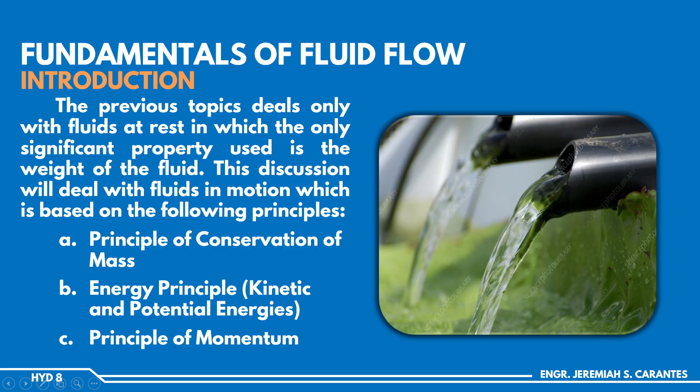We have three main principles around which our discussion on fluid flow will revolve. First, we have the principle of conservation of mass. This principle states that mass can neither be created nor destroyed within a closed system.

In other words, for example in a pipe, since that's closer to fluid flow, whatever volume of water or liquid enters the pipe, that same amount will also leave, assuming that the pipe itself is a closed system, meaning there are no external factors that can affect it. So that's basically what the principle of conservation of mass means - whatever enters is what also leaves.

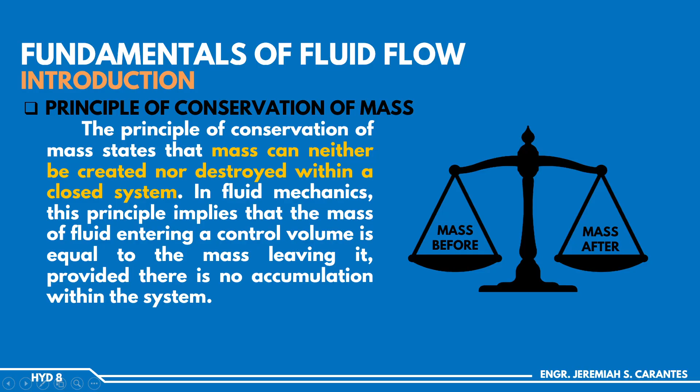So in fluid mechanics, this principle implies that the mass of fluid entering a control volume is equal to the mass leaving it, provided there is no accumulation within the system.

Another principle is the principle of conservation of energy. This is similar to our principle of conservation of mass, except that it now refers to energy. This principle also states that energy is conserved - it's not added to nor subtracted from. However, when it comes to energy, it can change form from one to another.

The common forms of energy we know are kinetic energy and potential energy. We'll discuss these later on. Kinetic energy is due to motion, while potential energy has two types - due to position and due to elevation - which together govern the behavior of fluids as expressed in the energy equation such as Bernoulli's equation.

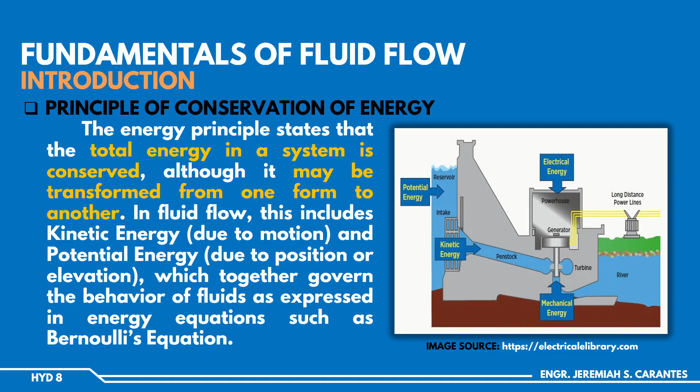The third one is the principle of conservation of momentum. This principle was actually already tackled last time in relative equilibrium. If you can remember, we derived our formula: F is equal to MA. But what we used last time was the reversed effective force. But there, we showed that the change in momentum will actually give us this equation, Newton's second law of motion.

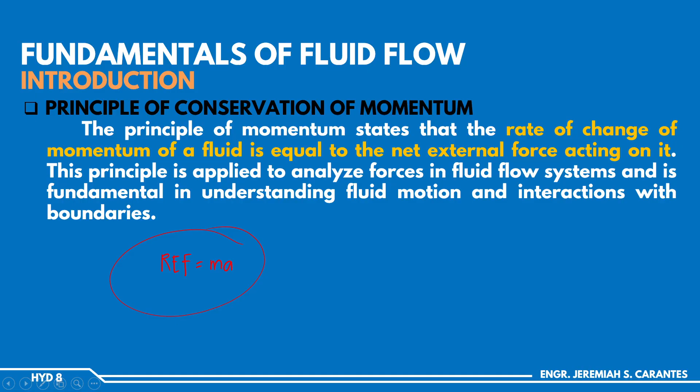This principle is applied to analyze forces in fluid flow systems and is fundamental in understanding fluid motion and interaction with boundaries. The first two principles are the main ones for our early topics in hydraulics, and momentum is more often seen in the latter part, specifically in hydrodynamics.

For this one, we have the discharge or flow rate. The notation we use for it is capital Q, or uppercase Q. By definition, it is the amount of fluid passing a section of a stream in unit time, called the discharge. When we say amount of fluid passing, we can express that as the volume, per unit time - so that's volume divided by time. This is equal to what we call discharge.

When it comes to discharge, we have three versions: the volume flow rate, mass flow rate, and weight flow rate. By the way, for discharge, as we said, this is volume over time, so of course we can express its unit. What's the common unit of volume? That's cubic meter. The common unit of time - well, it's not really common, there's only one unit of time we use.

That's seconds, minutes, hours, and so on. So cubic meter per second is a common unit for discharge.

Now, this is not the only formula for discharge. It can also be expressed as Q, M, or W. This Q, the volume flow rate, is the same as our volume over time formula - the values are the same, just different formulas. So our Q can also be expressed as the product of the area of flow times the velocity of flow, which is still cubic meter per second.

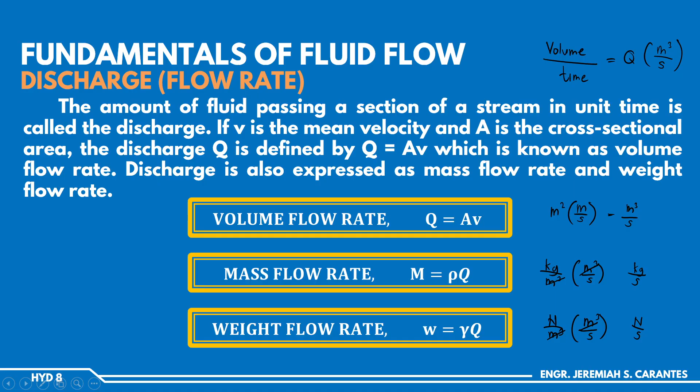So these are the different expressions of our discharge. And these are our notations, along with the common units used for each.

Next one is the types of flow. I listed 4 here, but flow types aren't limited to just 4 - these are just the significant ones for our fundamentals. First, we have steady flow.

It is the type of flow wherein the velocity of the fluid is constant at any point. The opposite is unsteady - when the flow is unsteady, the fluid's velocity can differ between any two points.

For example, our velocity is said to be constant at any point. So if we have a flow from point 1 to point 2, at any point, the velocity is constant, regardless of which section you pick.

Now there's one with almost the same definition - that's what we call uniform flow. This occurs if, with steady flow for a given length or reach of a stream, the average velocity of flow is the same at every cross-section. It seems like a similar meaning, right?

But just to differentiate the two - let me write this down. For steady flow, our concern is the velocity. So steady and uniform are both about velocity, but what differs is that for steady flow, the change in velocity with respect to the change in time is equal to 0.

While for unsteady, of course, it's not 0 - meaning the velocity varies with respect to time.

While for uniform flow, the velocity is still constant, but it is with respect to the given length or reach. Meaning the change in velocity with respect to the change in position is equal to 0. I hope you understand the difference.

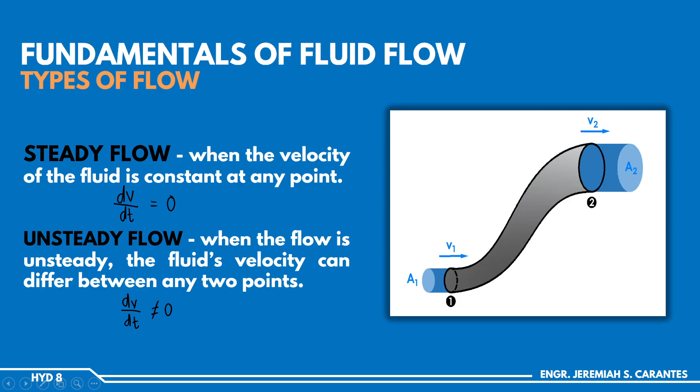So here, at any given time, the velocity is constant. Here, at any given section, the velocity is constant. I hope the difference is clear.

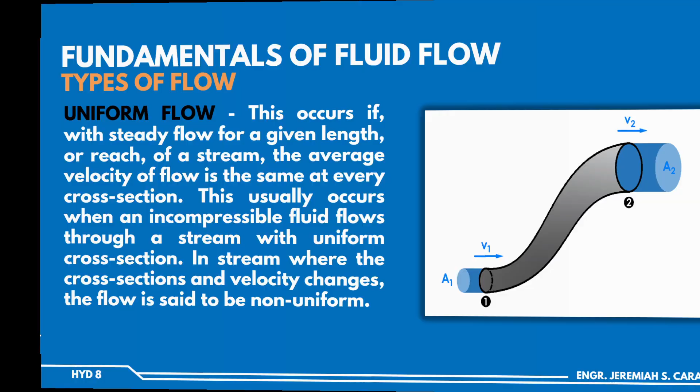And then the fourth one, we have continuous flow. Here, the discharge is constant at every section - the change in discharge with respect to the change in time is equal to 0. So the discharge doesn't change - whatever flows into section 1, the same amount flows out at section 2.

Next, we have the continuity equations. This is actually based on continuous flow. Whatever amount of liquid passes through section 1 should be the same amount that passes through section 2 - that's the concept of constancy of discharge. So we can say that Q1 is equal to Q2.

Remember the formula for Q - we can express it as the product of area and velocity. So we can say area 1 times V1 is equal to area 2 times V2. To maintain constant discharge, since the areas are different, area 2 is much larger than area 1.

From this continuous flow, these continuity equations originate. Now we have two types - for incompressible and for compressible fluids. For incompressible fluids, the constant is the volume flow rate. For compressible fluids, the constant is the mass flow rate and the weight flow rate.

For discharge, here's the formula - area times velocity, and that's constant, regardless of which point you consider in the system. Same with compressible fluids - mass flow rate at point 1, point 2, and point 3, and the weight flow rate, are constant at any section in the system.

Next, we have energy and head. It's important to understand what these two terms mean. When we say energy, it is defined as the ability to do work. The unit for energy and work are actually the same - expressed in terms of Newton-meter, which is equal to the unit joules. So joules is equal to Newton times meter. In English units, that's pound-foot.

Kinetic energy and potential energy are the two commonly recognized forms of energy. In a flowing fluid, potential energy may be subdivided into energy due to position or elevation above a given datum line, and energy due to pressure in the fluid. While head is the amount of energy per Newton or per pound of water. When we say energy, this is what causes the flow in a liquid - energy is what causes the motion.

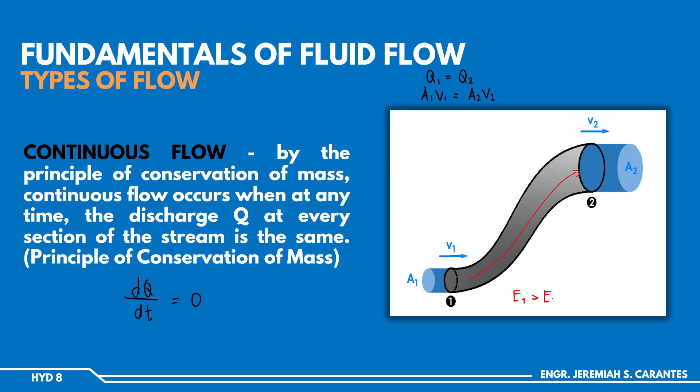It is also said that from point 1 to point 2, flow occurs when the energy is greater at one point. For example, in our figure, let's go back to this - we can say the flow of water is from point 1 to point 2. So the direction of flow will be like that if the energy at point 1 is greater than the energy at point 2. That's the significance of energy.

While what we refer to as head is actually the expression of this energy in terms of a column of fluid or a column of liquid. So that means the greater the energy, the greater the head as well. This head we can also call energy head - we're just more accustomed to using the term head for it. So to repeat, greater energy means greater head, and vice versa - greater head also means greater energy.

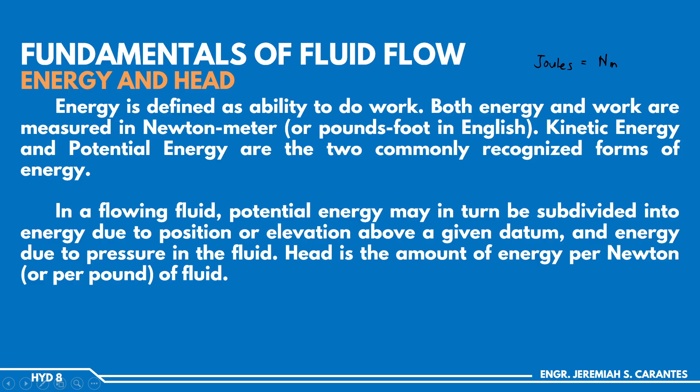Kasi si head is actually the amount of energy possessed per Newton of fluid. And for this head, meron tayong iba't ibang klase sa kanya. So, ito na yung mga yun. So, first, we have the kinetic energy and the velocity head.

It is the ability of a mass to do work by virtue of its velocity. The kinetic energy of a mass having a velocity, so ito yung ating formula, no? I hope familiar naman lahat to from physics. Kinetic energy is equal to 1/2 mv squared, where m is the mass and v is the velocity. So dito, ang ating mass can be expressed as weight over the acceleration due to gravity. So this is staying with the formula na W is equal to mg. So pinalitan lang natin, in-extract natin yung m. So dito, if we substitute this m sa ating equation ng kinetic energy, we get that the velocity head is equal to velocity squared divided by 2g.

Siguro para mas maintindihan, no? When we say head, ang definition kasi ng head, basically, H or the head is equal to the energy divided by its weight. Masakit sa mata ang kulay red, gawin ko na lang siyang black.

So for example, dito, if we want to get the velocity head, we use the kinetic energy and divide it with its weight. Now dito, ang kinetic energy natin, by formula, that is 1/2 mv squared, divide it with W na weight. Now from this one, sabi natin si M, pwede natin siyang palitan ng W over G while multiplying with V squared and then divide it by W. Na if we simplify this, magka-cancel yung W. So ang matitira, V squared tapos sa ilalim merong 2G. That's basically V squared over 2G.

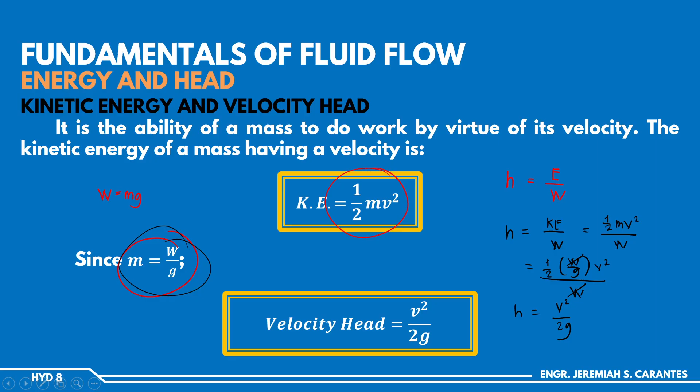So ganyan na-derive yung ating velocity head, just substitute energy over weight. So ito yung general formula natin pagdating kay head, regardless kung anong energy ang gamitin mo. So just be specific, no? Kung velocity head, kinetic energy ang gagamitin. And pagdating kay itong dalawang ito, pressure head and then elevation head, so ang gagamitin mo naman is si potential energy. So dito, ang ating gravitational potential energy, by formula that's mgz.

So Z yung ginagamit pero sa physics kasi it is commonly mgh. Yun yung formula natin. So dito, sige, gamitin natin muna yung h para makuha yung elevation head, so that's potential energy divided by its weight. Ang potential energy due to gravity, that's m, g, and h. While si weight, 'di ba sabi natin equal lang din naman siya kay mg. So magka-cancel lang, basically si h equal lang siya kay h. Kaya hindi h yung ginagamit natin kasi magiging parehas sila ng notation.

So dito yung z natin basically that's an elevation from a set reference point na tinatawag nating datum. So for example, magse-set kayo ng reference point, let's say ito yung ating datum line. And then, baga ito yung point mo, let's say, meron kang elevated na tank. Ito yung tubig niya. And then, you can say that from the datum line, this is 2 meters. So, etong location ng 2 meters, actually, kayo yung magsiset niyan.

So, depende kung saan nyo gustong ilagay. Gusto nyo 2 meters below the bottom ng ating tank, or kung gusto mo naman, 10 meters below the bottom of the tank, okay lang siya. Ang importante kung ano yung sinet mong reference considering ang isang system natin, kung maging consistent na siya regardless kung anong kino-consider mong point dun sa system na yan.

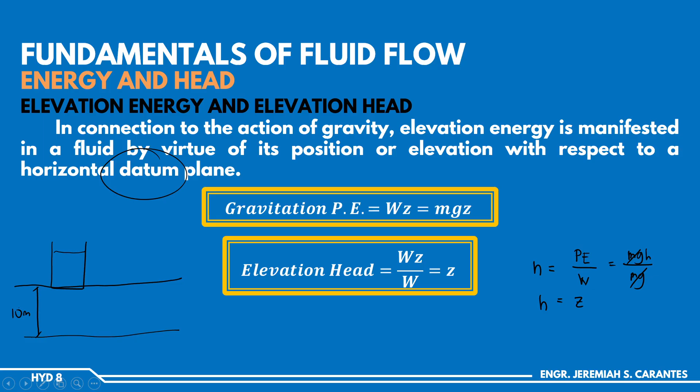So, kung gusto nyo, pwede rin nandito ang ating datum line just below nung pinaka-tank natin. Okay lang din na nandyan yung datum line nyo or the reference plane. Walang limitation naman na nagsasabi na dapat ganito or ganyan yung location ng datum. Pero siguro wag niyo na lang pahirapan yung sarili niyo. Kasi minsan, siyempre eto si elevation, importante rin yung direction. Possible na from a reference point, positive or negative yung elevation ninyo. Siguro wag niyo na lang i-set yung reference niyo wherein magpo-produce siya ng negative na elevation, para hindi na kayo mahirapan. So, eto yung ating elevation head and then the other is the pressure head.

So, si pressure head is expressed as P over gamma. Now, kung gusto niyo makita pa rin yung definition, 'di ba sabi natin si H equal siya kay potential energy divided by weight. Si potential energy natin, that's mg times H divided by weight.

Dito, i-express natin ulit si M as the ratio ng W over G, while si H pwede natin siyang i-express in terms of P over gamma. Eto rin yung formula natin sa principles of hydrostatics na ginagamit natin dati. Now if we substitute everything, si pressure head equal siya kay W over G times G times P over gamma, divided by weight. So everything cancels except P over gamma.

Kung gusto niyo mas direktang derivation, tandaan niyo yung formula na 'to kay hydrostatics, P is equals to gamma times H. So this is the pressure caused by this unit weight. Etong H na 'to is the height of a column of liquid which produces this magnitude ng pressure. So from this, ito lang din naman yan - H is basically P over gamma.

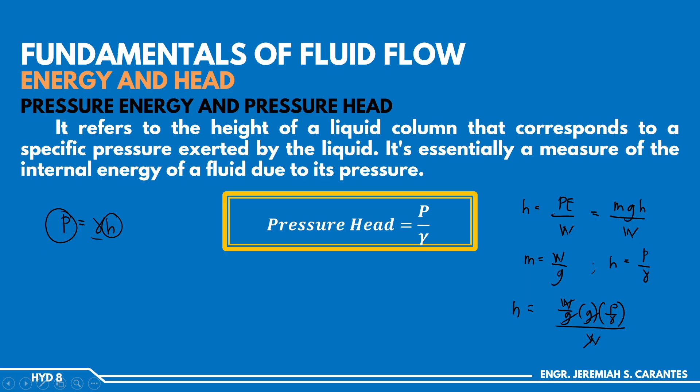Pero ito ang derivation natin kung gusto niyo siyang i-relate dun sa ating energy over weight na formula. So this is the pressure energy and pressure head. Dito, isang head para kay kinetic energy, at dalawang head para kay potential energy. So in total, meron tayong tatlong energy, tatlong klase din ng head. Pag pinag-add natin yung tatlong yun, ang tawag natin doon is the total energy or the total head.

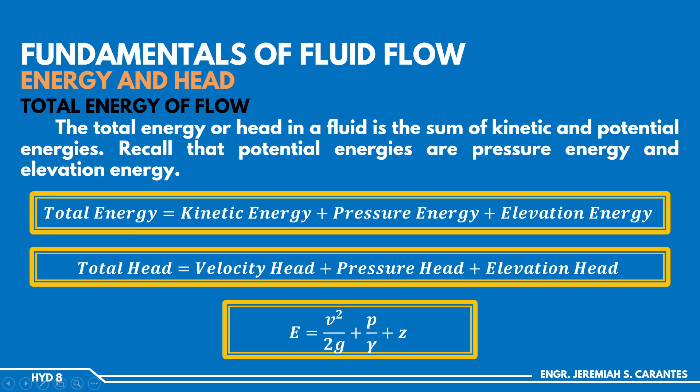So ito naman yung mga yon - the total energy, dagdag mo lang lahat ng energy: kinetic, pressure, and elevation. Ganon din dun sa kanyang head: velocity head, pressure head, and elevation head. So by formula, ito yon - ito yung ating velocity head, ito yung ating pressure head, ito yung ating elevation head. Ipag-add lang natin lahat to get the total. Etong equation na 'to, ito na kasi yung gagamitin natin para dun sa ating mga energy equations. Ito yung ating mga notations and their common units.

Okay, next is we have the hydraulic grade line. Si hydraulic grade line is actually a line that can be drawn if you add yung ating mga potential energies or potential head. Dito, ito yung ating datum line. Let's say ito yung ating setup - meron tayong isang pipe, kikita naman yung direction of flow. And then nagbigay tayo ng dalawang piezometer at point 1 and point 2.

Dito, ang ating hydraulic grade line, basically madodrawing natin siya if from point 1 to point 2, for example, series of points - itong mga point na to, kinonsider mo lahat. Tapos yung mga point na yan, kinuha mo lahat ang kanilang elevation head plus yung kanilang pressure head, kasi basically yun yung total na potential head natin. Remember, dalawa kay potential, isa kay kinetic. So kapag pinag-add mo lahat yung potential head nila, tapos ginawa mo yon for series of points sa isang line, tapos drawing mo o plinat mo yung mga points na yun, magdodrawing natin yung ating hydraulic grade line. Isa pang characteristic ng ating hydraulic grade line, it actually follows the water level dun sa ating mga piezometer sa ganitong klase ng setup.

Dito actually meron tayong mas detailed na description yung dalawang lines na yan. HGL and EGL both slope downward in the direction of flow. Dito kay HGL, it may rise or fall due to the change in pressure, while kay EGL, it will only rise with the presence of a pump. Babalikan natin - ito yung direction of flow from point 1 to point 2.

So the slope is downward for our two lines with respect to the direction of flow. Same with this example: from this tank, the water will flow towards the smaller tank because it has less content. So both the EGL and HGL slope downward.

So other characteristics, let's focus on HGL first. HGL is parallel to EGL for a uniform pipe cross-section. An example of that is this first figure - EGL is parallel to HGL when it's uniform.

The pipe we're referring to is this one. We placed two standing pipes, the piezometers, which are just there to measure the amount of pressure at each point. But our actual pipe is this bigger pipe. So when the cross-section of our pipe is constant, EGL is always parallel to HGL.

As you can see in our second figure, the two lines are no longer parallel because the diameter at point 1 and point 2 are no longer the same.

Okay, another characteristic: for horizontal pipes with constant cross-section, the drop in pressure gradient between two points is equivalent to the head loss between these two points. We already know what head means.

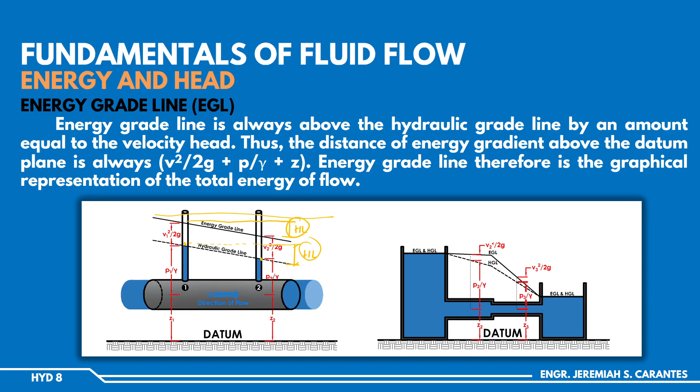Next, we have the Bernoulli's energy theorem. This is actually the main theorem when there's no head loss. When we say there's no head loss, this is the appearance again - going back, the EGL is horizontal. When the EGL is horizontal, basically the initial energy is just equal to the final energy.

This is straight up our conservation of energy. So neglecting head loss, the total amount of energy per unit weight is constant at any point in the path of flow. Now, our energy formula is the summation of velocity, pressure, and elevation. Hence, E1 is equal to E2.

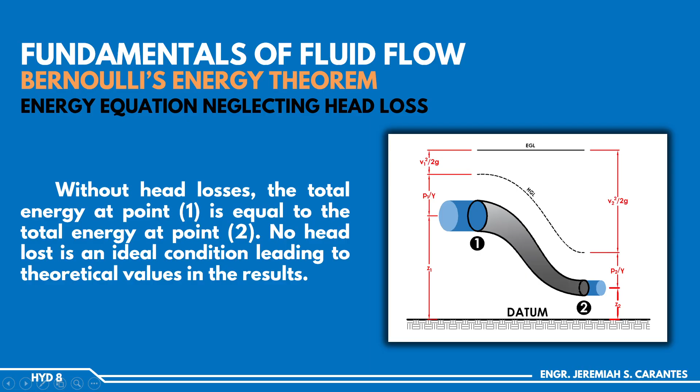Then this is when there is head loss. So here, when we consider head loss, our equation becomes E1 equals E2 plus HL. Now originally, the equation should really be E1 minus HL equals E2.

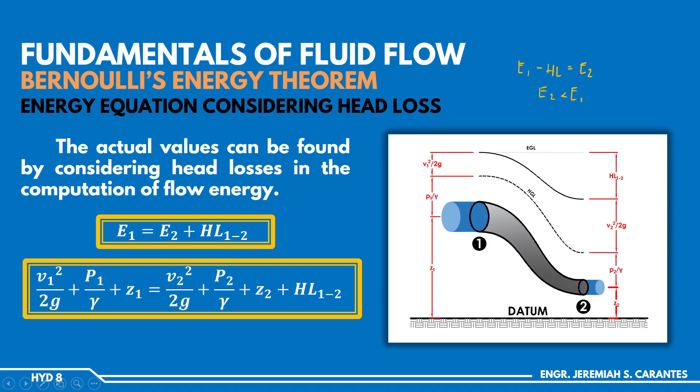So as you can see here, our EGL is no longer horizontal. It's also not parallel to HGL because the cross-section of our pipe is not constant. So this is the energy equation considering head loss.

This is our energy equation when there is a pump. So when we say pump, basically what it does is add head to our system. Remember we said head is what causes the flow, because a bigger head means bigger energy.